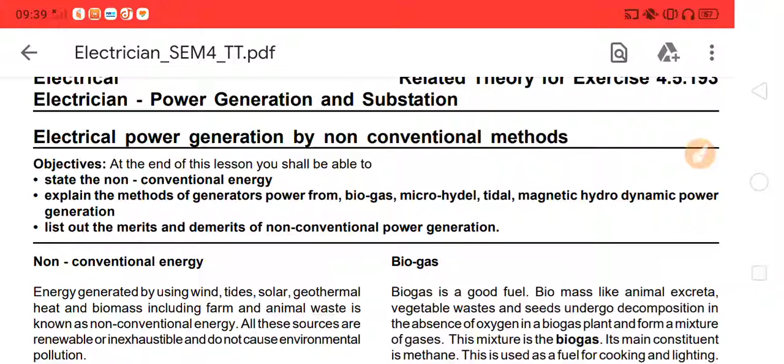Electric power generation by non-conventional method. Non-conventional energy source: energy generated by using wind, tide, solar, geothermal heat, and biomass, including farm and animal waste, is known as non-conventional energy. All these sources are renewable, inexhaustible, and do not cause environmental pollution.

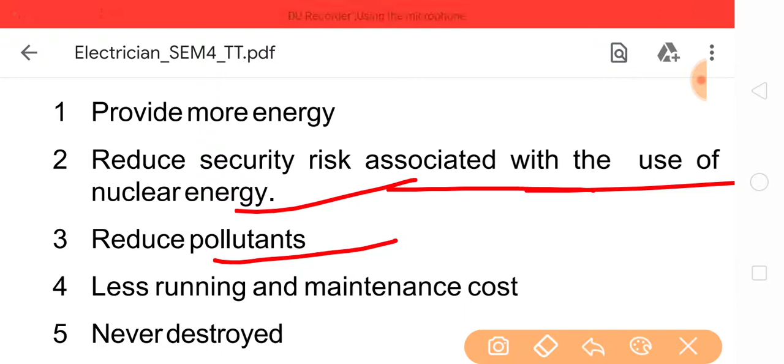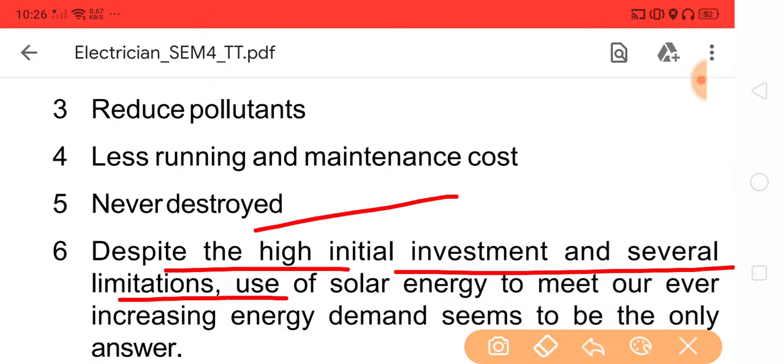Merits of non-conventional over conventional sources of energy: provide more energy, reduce security risk associated with the use of nuclear energy, reduce pollutants, less running and maintenance cost, never destroyed. Despite the high initial investment and several limitations, use of solar energy to meet our ever increasing energy demand seems to be the only answer. Greenhouse effect and global warming is avoided.

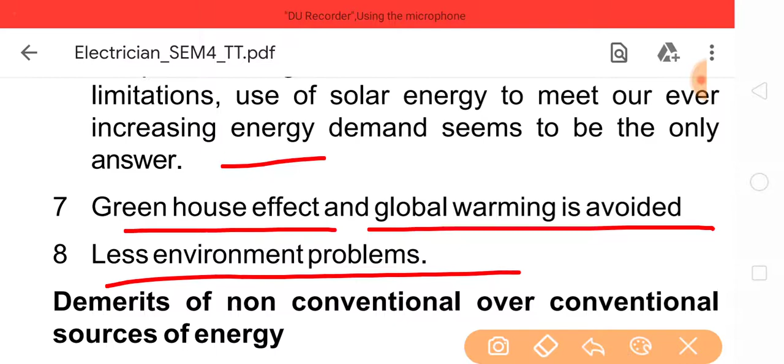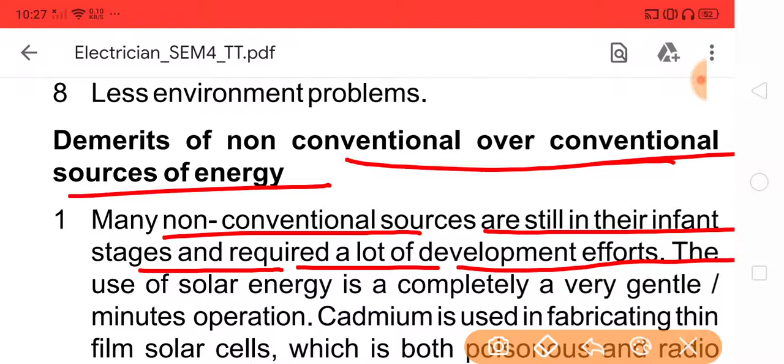Less environmental problems. Demerits of non-conventional over conventional sources of energy: many non-conventional sources are still in their infant stage and require a lot of development effort. The usage of solar energy is a very delicate operation.

Cadmium is used in fabricating thin film solar cells, which is both poisonous and radioactive, but a very small quantity of cadmium is released from discarded PV panels. Carbon dioxide is produced while forming silicon from silica, increasing atmospheric temperature. High initial cost, less reliable, and efficiency; cannot be used for base load demand.

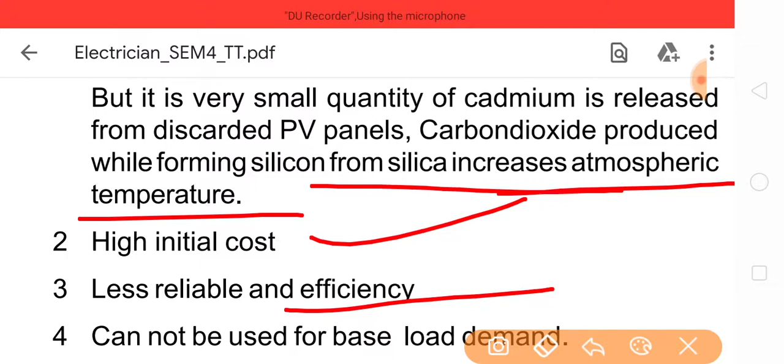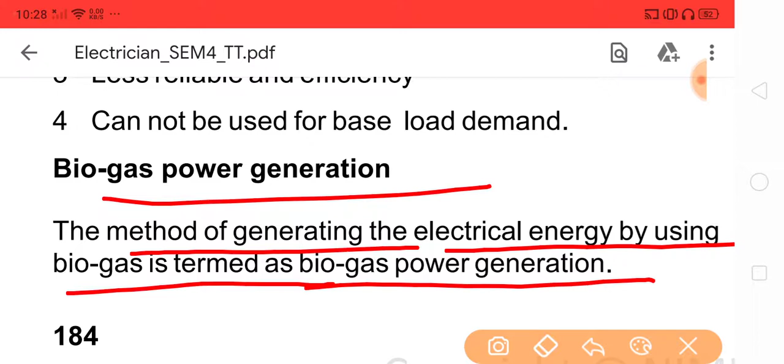Biogas power generation: the method of generating electrical energy by using biogas is termed biogas power generation. Biogas is a good fuel. Biomass like animal excreta, vegetable waste and seeds undergo decomposition in the absence of oxygen in a biogas plant and form a mixture of gases. The mixture is the biogas. Its main constituent is methane. This is used as a fuel for cooking and lighting.

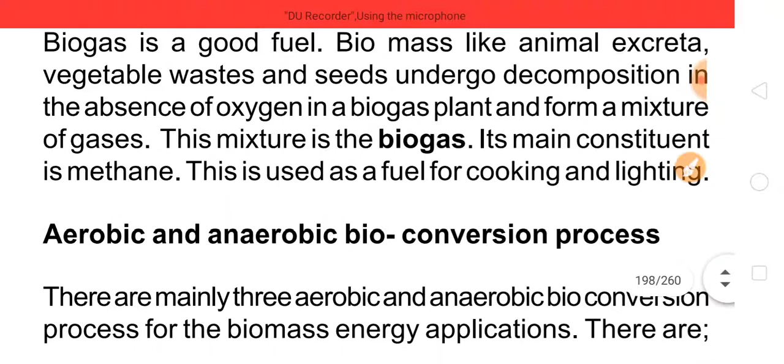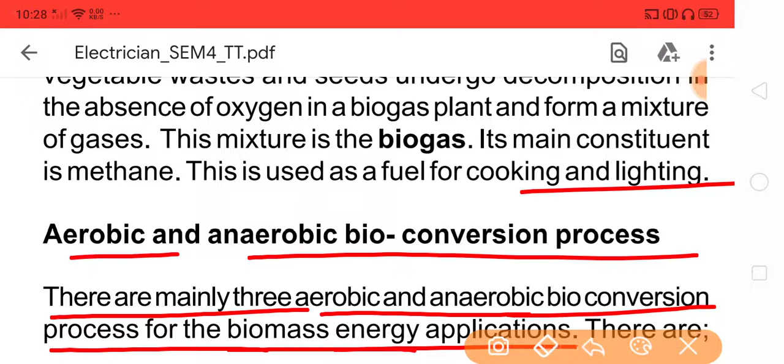Aerobic and anaerobic bioconversion process. There are three aerobic and anaerobic bioconversion processes for biomass energy application. Bioproducts: converting biomass into chemicals for making products that typically are made from petroleum. Biofuels: converting biomass into liquid fuels for transportation. Biopower: burning biomass directly, or converting it into a gaseous fuel or oil, to generate electricity.

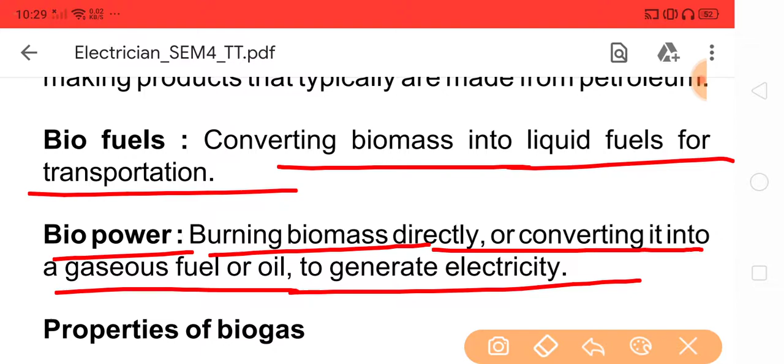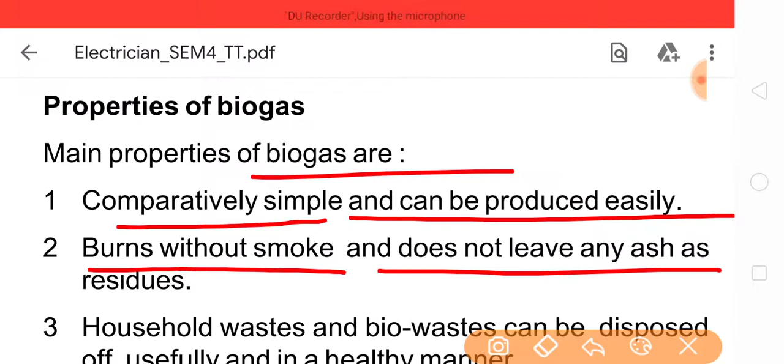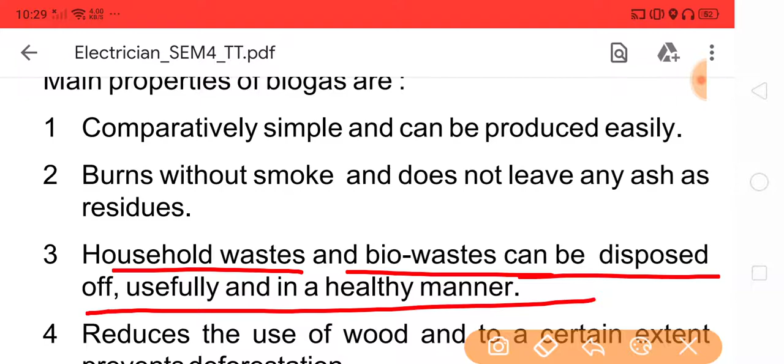Properties of biogas. The main properties of biogas are: comparatively simple and can be produced easily, burns without smoke and does not leave any ash as residue. Household waste and bio-waste can be disposed of usefully and in a healthy manner. Reduces the use of wood and to a certain extent prevents deforestation. The slurry from the biogas plant is excellent manure.

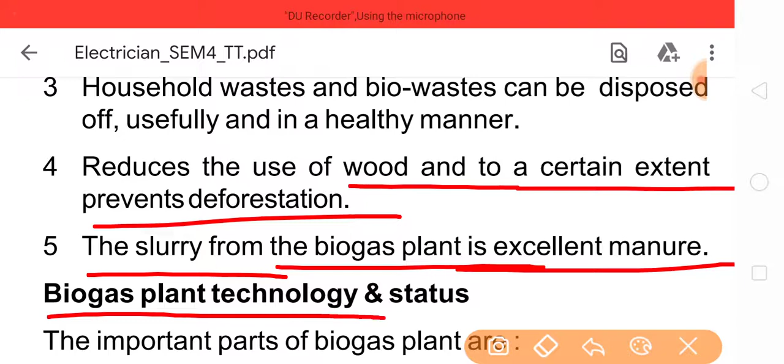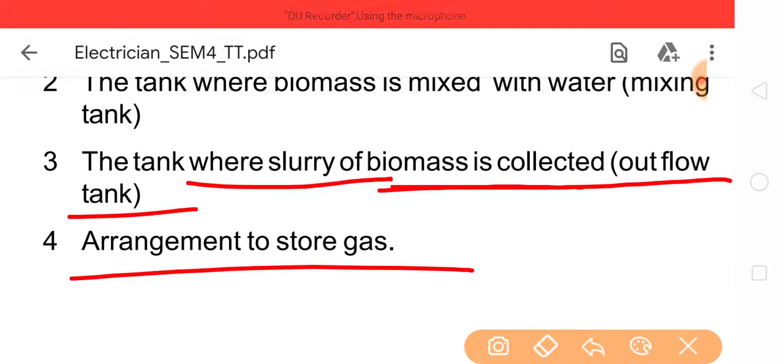Biogas plant technology and status. The important parts of a biogas plant are: the tank where biomass undergoes decomposition, the digester; the tank where biomass is mixed with water, the mixing tank; the tank where slurry of biomass is collected, the outflow tank; and an arrangement to store gas. Due to the action of bacteria in the absence of oxygen, biogas is produced in the plant. This is collected in the tank.

In the gas holder type plant, the cylinder rises up as the gas fills the tank and the storage capacity increases. The gas storage capacity of the dome type will be less than that of the gas holder type. Residues of biomass slurry can be used as good manure. Biogas plants are built in several sizes, small 0.5 cubic meter per day to very large 2500 cubic meter per day. Accordingly, the configurations are simple to complex.

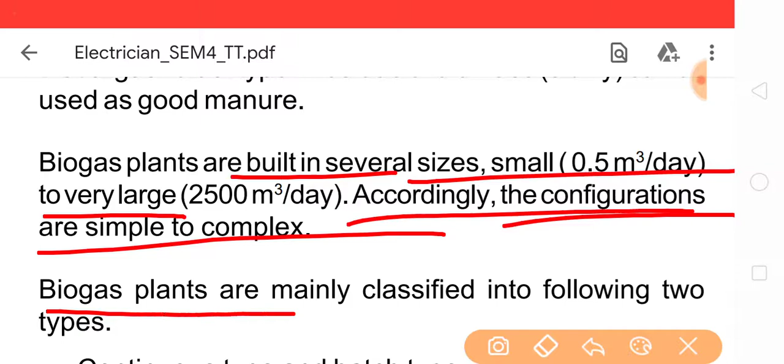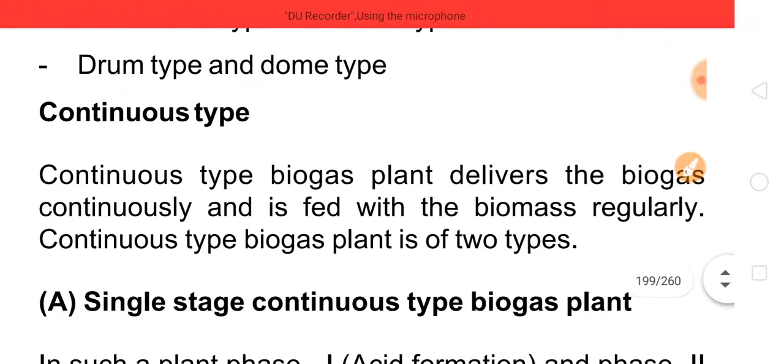Biogas plants are mainly classified into the following two types: continuous type and batch type; drum type and dome type. Continuous type biogas plant delivers the biogas continuously and is fed with biomass regularly. Continuous type biogas plant is of two types: single stage continuous type biogas plant, in such a plant phase 1 acid formation and phase 2 methanation are carried out in the same chamber without barrier.

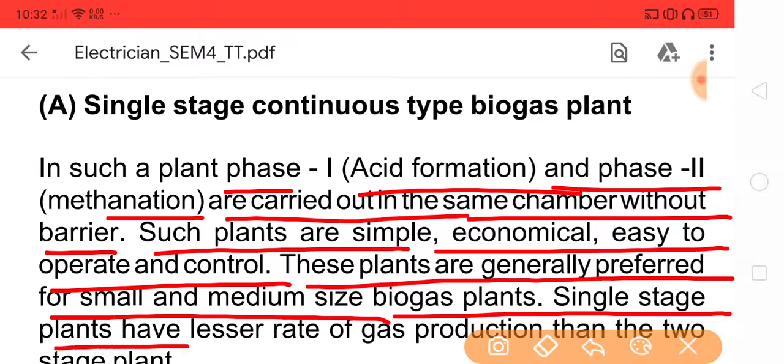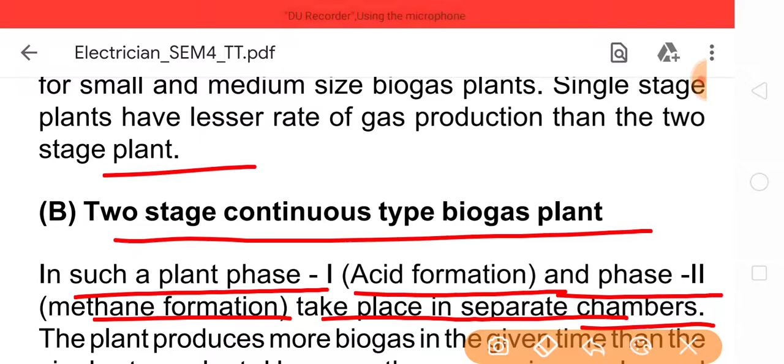Such plants are simple, economical, easy to operate and control. These plants are generally preferred for small and medium sized biogas plants. Single stage plants have a lesser rate of gas production than the two stage plant. Two-stage continuous type biogas plant: in such a plant, phase 1 acid formation and phase 2 methane formation take place in separate chambers. The plant produces more biogas in the given time than the single stage plant. However, the process is complex and the plant costly, difficult to operate and maintain. Two-stage plant is preferred for large biogas plant systems.

Batch type biogas plant. The biomass is fed in batches with a large time interval between two consecutive batches. One batch of biomass feed is given sufficient retention time in the digester, 30 to 50 days. After completion of digestion, the residue is emptied and the fresh charge is fed. The fresh charge may be subjected to aeration or nitrogenation after feeding, and then the digester covers are closed for the digestion process. Thereafter, biogas is derived from the digester after 10 to 15 days. Fermentation continues for 30 to 50 days.

Salient features: the batch type biogas plant delivers gas intermittently and not continuously. Batch type biogas plant may have several digester reactors which are fed and discharged in a sequential manner to obtain output biogas continuously. Batch type biogas plants have longer digestion time and are therefore more suitable for materials which are difficult for anaerobic digestion, harder, fibrous biomass. Batch type biogas plants need initial seeding to start the anaerobic fermentation.

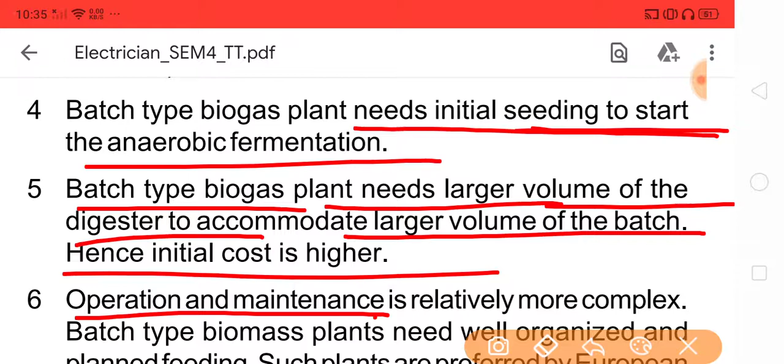Batch type biogas plants need initial seeding to start the anaerobic fermentation. Batch type biogas plants need a larger volume of the digester to accommodate the large volume of the batch, hence initial cost is higher. Operation and maintenance is relatively more complex. Batch type biomass plants need well organized and planned feeding. Such plants are preferred by European farmers. Such plants are not yet popular in India.

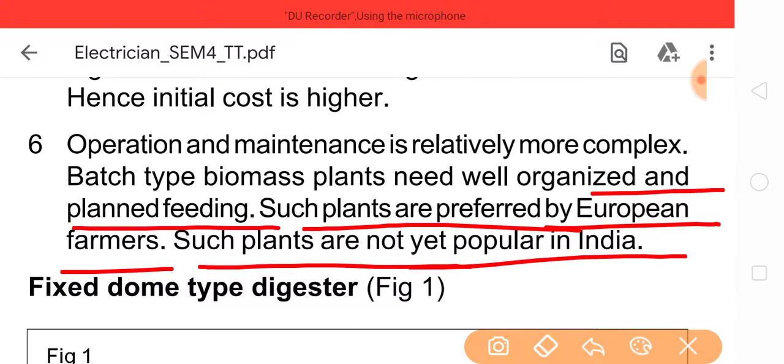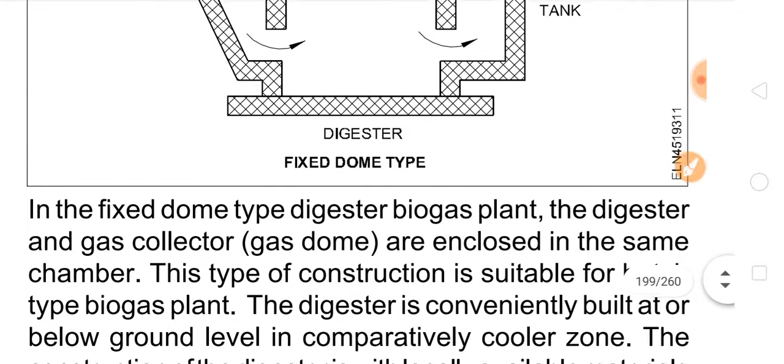Fixed dome type digester, pictured here: this is the biomass, water and cooling chamber, biogas, slurry, mixing tank and outflow tank, digester. Fixed dome type. In the fixed dome type digester biogas plant, the digester and gas collector gas dome are enclosed in the same chamber. This type of construction is suitable for batch type biogas plants.

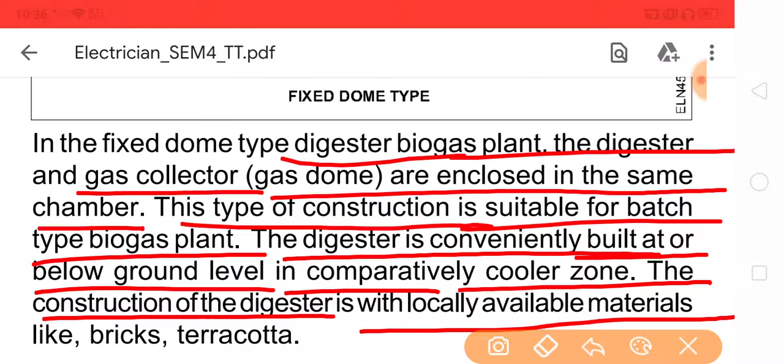The digester is conveniently built at or below ground level in a comparatively cooler zone. The construction of the digester is with locally available material like brick and terracotta. The pressure inside the digester increases as the biogas is liberated. The biogas gets collected in the upper portion of the digester in a dome-shaped cavity. The outlet pipe is provided at the top of the fixed dome.

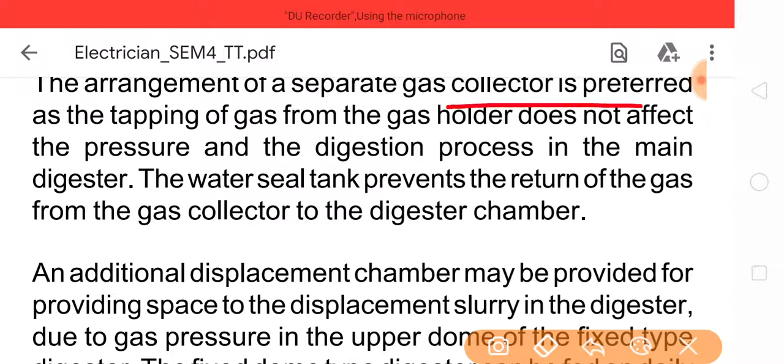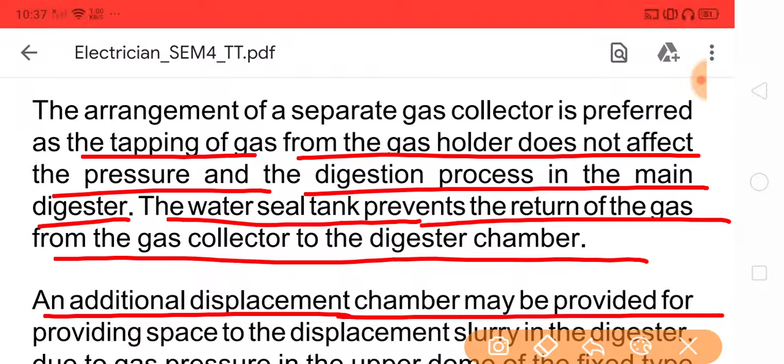Alternatively, the gas collector gas holder is a separately installed chamber. The digester tank and gas collector chamber are separated by a water seal tank. The arrangement of a separate gas collector is preferred so that the tapping of gas from the gas holder does not affect the pressure and the digestion process in the main digester. The water seal tank prevents the return of the gas from the gas collector to the digester chamber. An additional displacement chamber may be provided for providing space to displaced slurry in the digester due to gas pressure in the upper dome of the fixed type digester.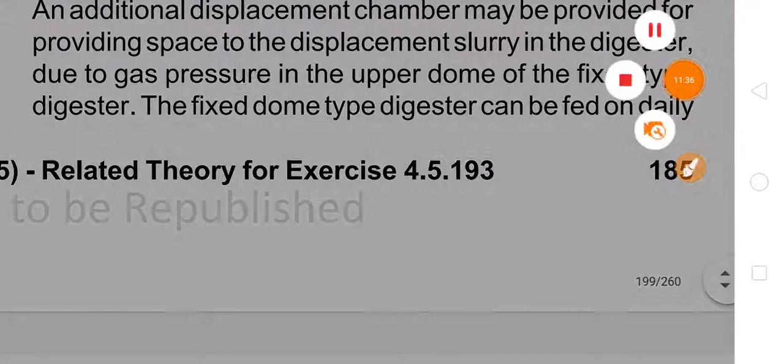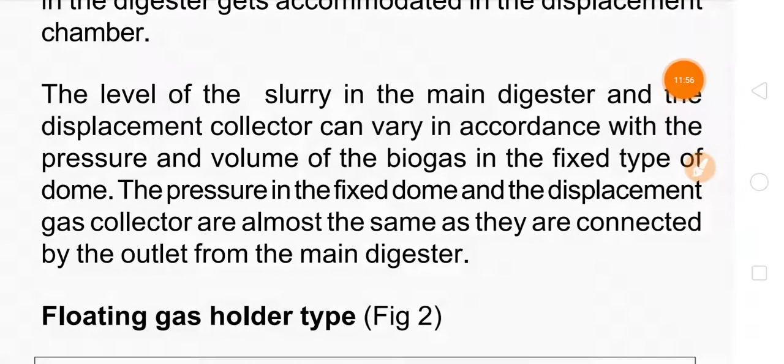The fixed dome type digester can be fed on a daily basis with a small quantity of slurry. The excess slurry in the digester gets accommodated in the displacement chamber. The level of the slurry in the main digester and the displacement collector can vary in accordance with the pressure and volume of the biogas in the fixed type of dome. The pressure in the fixed dome and the displacement gas collector are almost the same as they are connected by the outlet from the main digester.

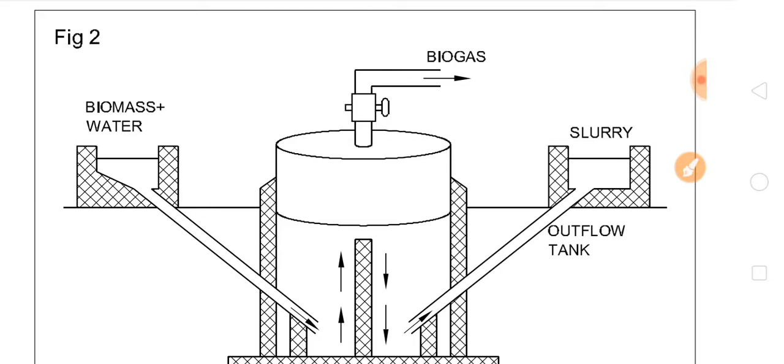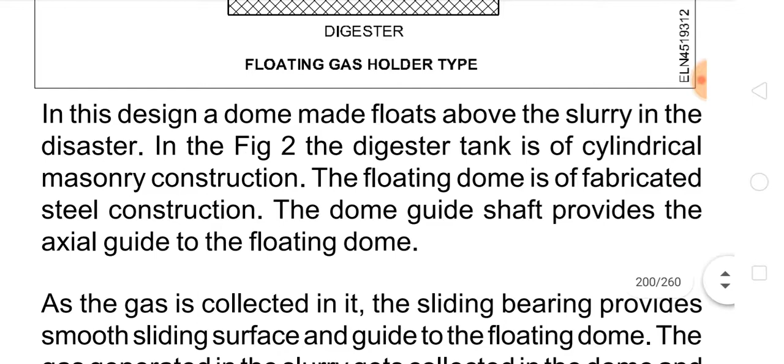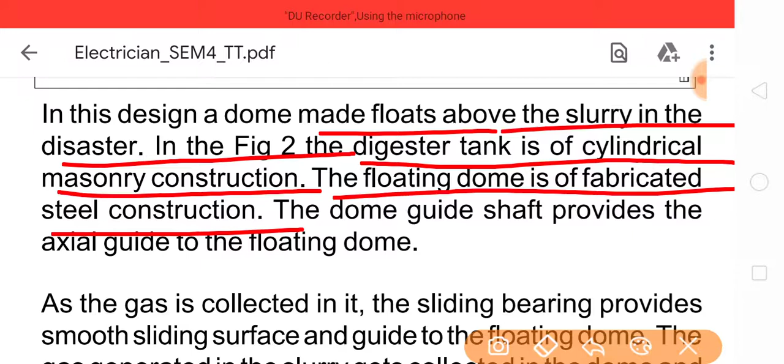Floating gas holder type, pictured here: this is the biomass water, and this is the biogas, and this is the slurry outflow tank and digester, floating gas holder type. In this design, a dome floats above the slurry in the digester. In picture 2, the digester tank is of cylindrical masonry construction. The floating dome is of fabricated steel construction. The dome guide shaft provides the axial guide to the floating dome.

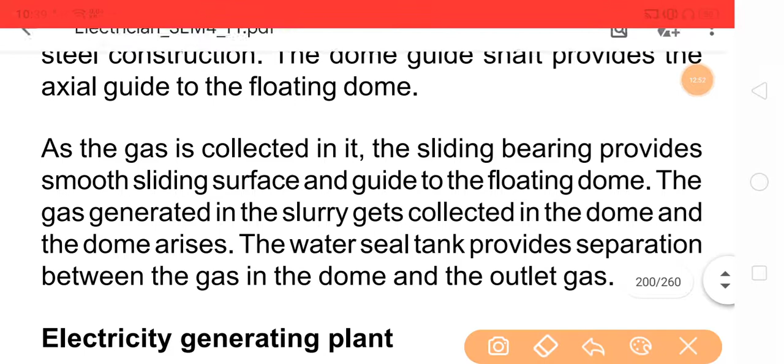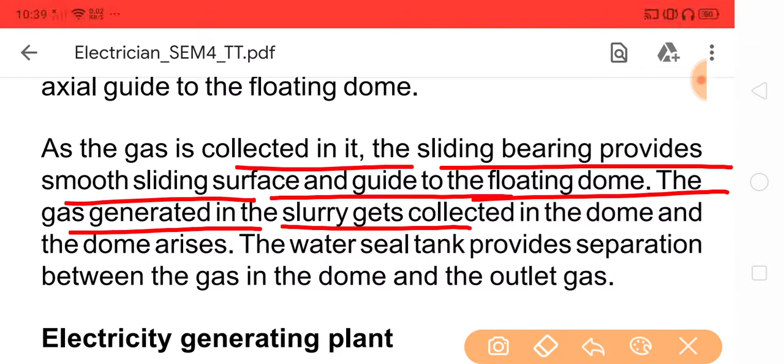As the gas is collected, the sliding bearing provides a smooth sliding surface and guide to the floating dome. The gas generated in the slurry gets collected in the dome and the dome rises. The water seal tank provides separation between the gas in the dome and the outlet gas.

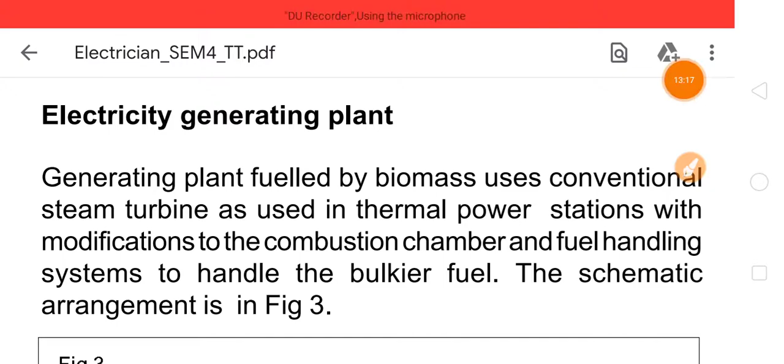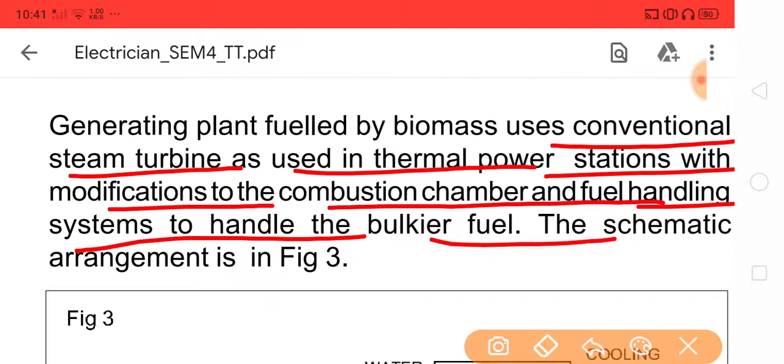Electricity generation plant. Generating plants fueled by biomass use a conventional steam turbine as used in a thermal power station, with modification to the combustion chamber and fuel handling system to handle the bulkier fuel. The schematic arrangement is pictured in figure 3.

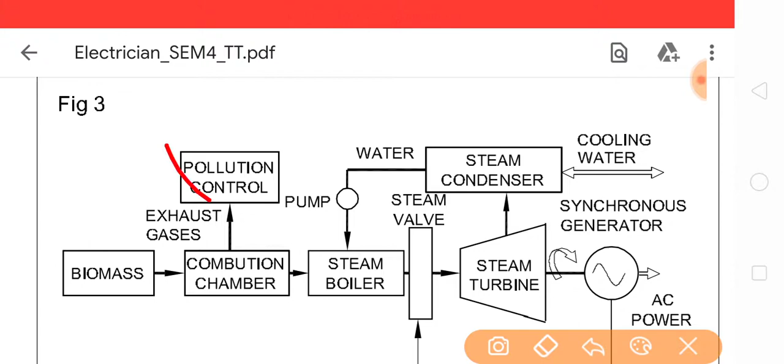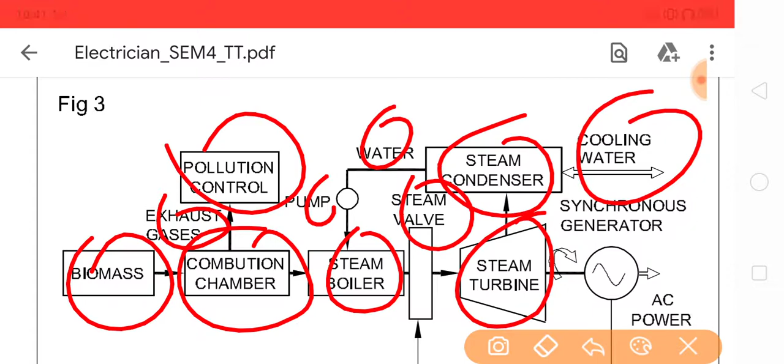This is the pollution control and exhaust gases, water, pumps and steam condenser. This is the cooling water, steam valve, steam boiler, combustion chamber, biomass and steam turbine. And this is the AC power. And this is the speed control, the electricity generation powered by biomass. Cogeneration. Because of the poor energy conversion efficiencies of biomass fuel, practical generating systems often employ cogeneration to achieve reasonable utilization of the generating plant.

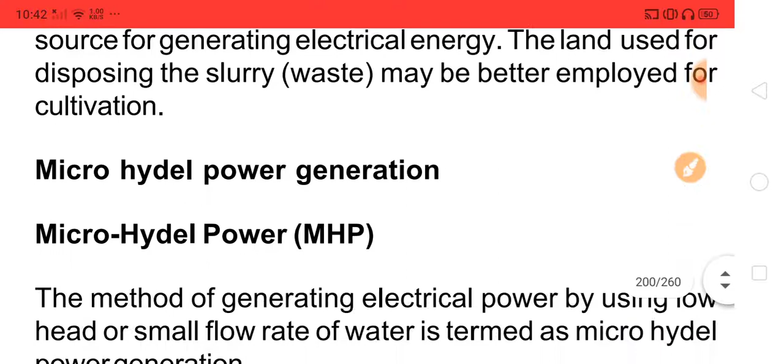Environmental issues. While biomass crops provide an environmentally friendly fuel source for generating electrical energy, the land used for disposing the slurry, that is waste, may be better employed for cultivation. Micro hydel power generation.

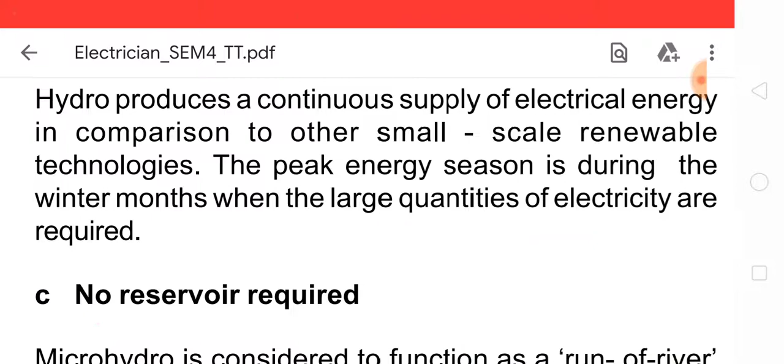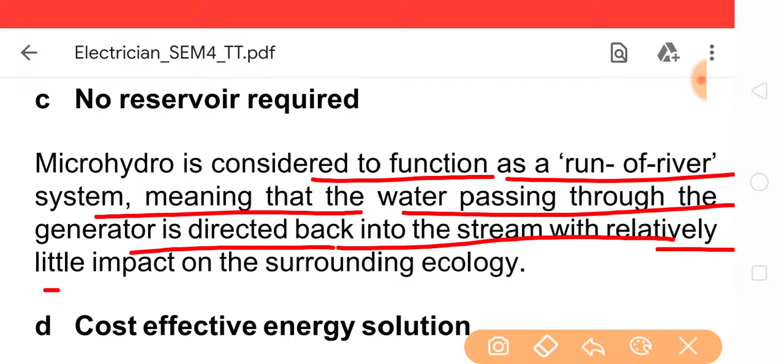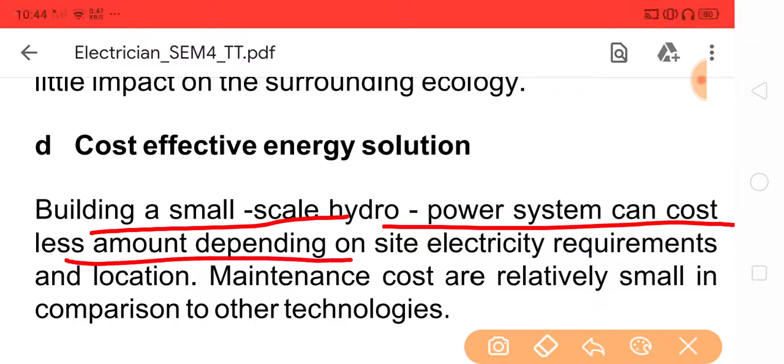Micro hydro is considered to function as a run-of-river system, meaning that the water passing through the generator is directed back into the stream with relatively little impact on the surrounding ecology. Cost-effective energy solution. Building a small-scale hydropower system can cost less depending on site, electricity requirements and location. Maintenance costs are relatively small in comparison to other technologies.

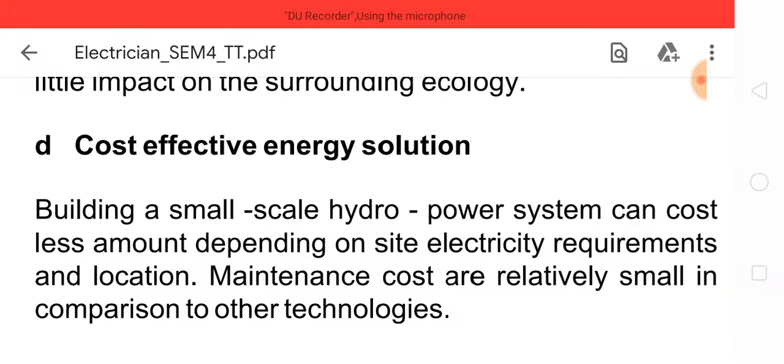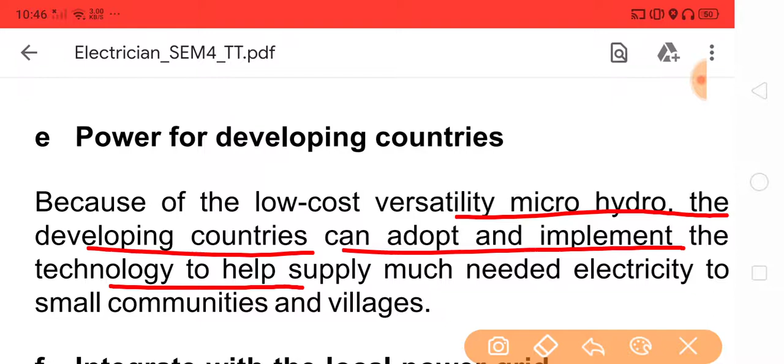Power for developing countries. Because of the low cost and versatility of micro hydro, developing countries can adopt and implement the technology to help supply much needed electricity to small communities and villages. Integrated with the local power grid. If your site produces a large amount of excess energy, some power companies will buy back your electricity overflow.

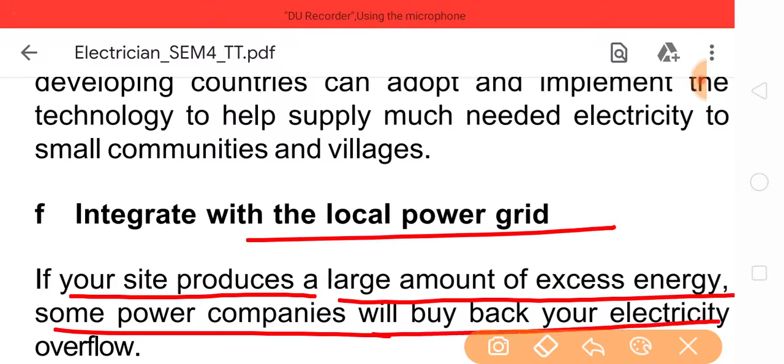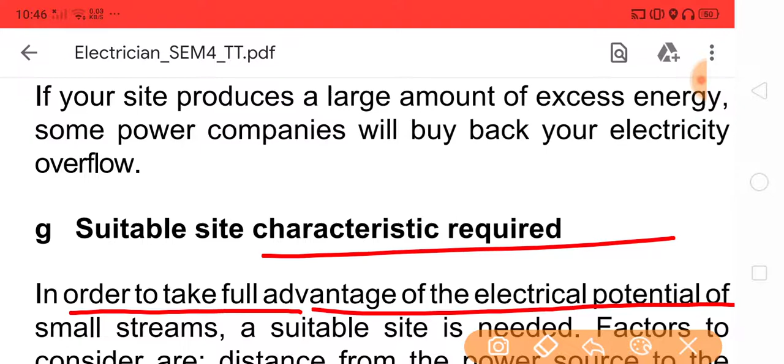Suitable site characteristics are required in order to take full advantage of the electrical potential of a small stream. A suitable site is needed. Factors to consider: distance from the power source to the location where energy is required, stream size including flow rate, output and head, inverter, batteries, controller, transmission line and pipelines.

Disadvantage: energy expansion not possible. The size and flow of a small stream may restrict future site expansion as power demand increases.

Low power in the summer months: stream size will fluctuate seasonally. During the summer months, there will likely be less flow and therefore less power output. Advanced planning and research will be needed to ensure adequate energy requirements are met.

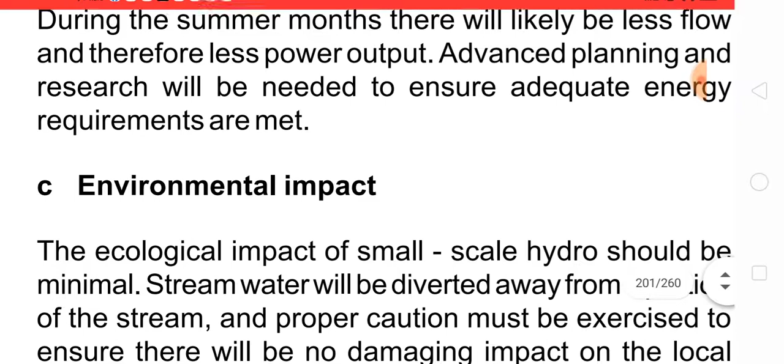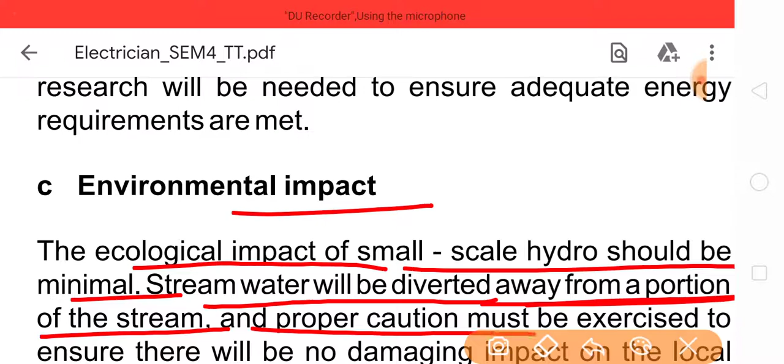Environmental impact: the ecological impact of a small scale hydro should be minimal. Stream water will be diverted away from a portion of the stream, and proper caution must be exercised to ensure there is no damaging impact on the local ecology or civil infrastructure.

Micro hydroelectric system basic components. Here are brief descriptions of the common equipment used in grid-interactive and off-grid micro hydroelectric systems. The basic components of the system may vary, as not all of the following equipment is necessary for every system.

Intake, pipeline, turbine, controls, dump load, battery bank, metering, main DC connect, inverter, AC breaker panel.

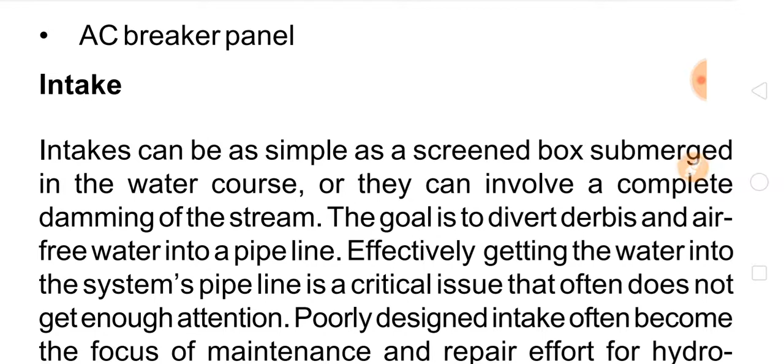Intake can be as simple as a screened box submerged in the water course, or it can involve complete damming of the stream. The goal is to divert debris-free water into a pipeline, effectively getting the water into the system.

Pipeline is a critical issue that often does not get enough attention. Poorly designed intakes often become the focus of maintenance and repair efforts for hydroelectric systems.

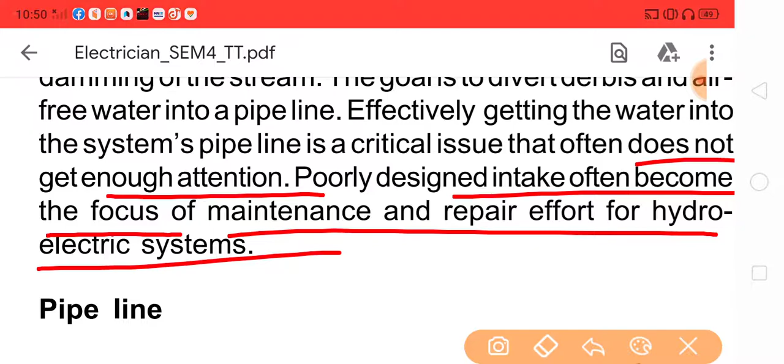Pipeline: most hydro turbines require at least a short run of pipe to bring water to the machine, and some turbines require piping to move water away from it. The length can vary widely depending on the distance between source and turbine.

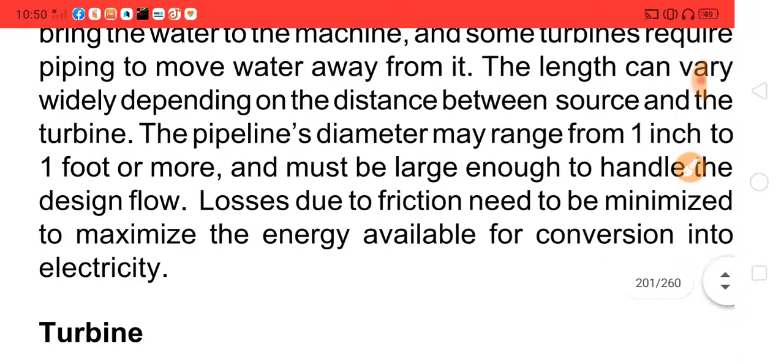The pipeline diameter may range from 1 inch to 1 foot or more, and must be large enough to handle the design flow. Losses due to friction need to be minimized to maximize energy available for conversion into electricity.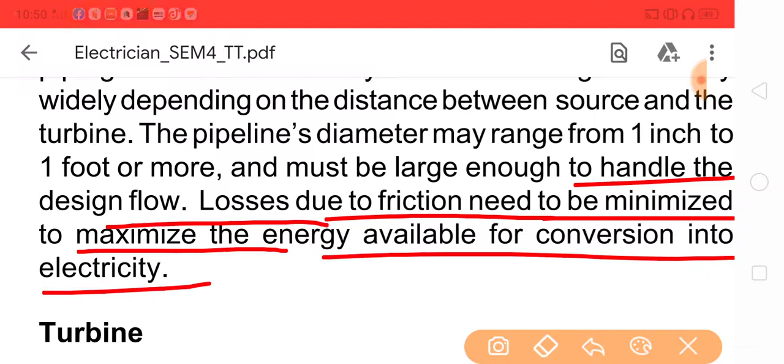Turbine: the turbine converts energy from the water into electricity. Many types of turbines are available, so it is important to match the machine to site conditions for head and flow.

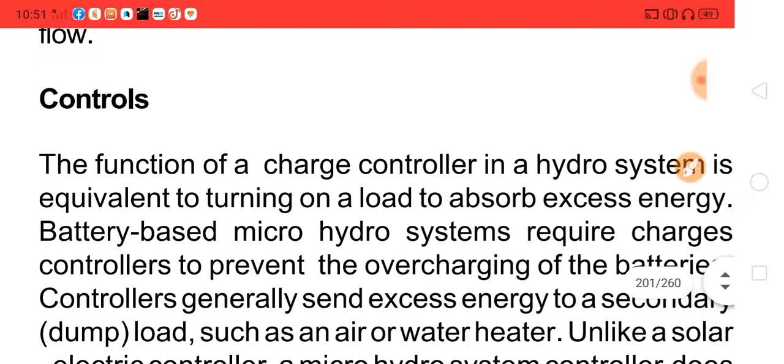Controls: the function of charge control in a hydro system is equivalent to turning on a load to absorb excess energy.

Battery-based micro hydro systems require a charge controller to prevent overcharging of the batteries. Controllers generally send excess energy to a secondary dump load, such as an air or water heater. Unlike a solar electric controller, a micro hydro system controller does not disconnect the turbine from the batteries.

This could create voltages higher than some components can withstand, cause the turbine to overspeed, which could result in dangerous and damaging over-voltage.

Dump load: an electrical resistance heater that must be sized to handle the full generating capacity of the micro hydro turbine. Dump loads can be air or water heaters and are activated by the charge controller whenever the battery bank cannot accept the energy being produced, to prevent damage to the system. The excess energy is shunted to the dump load when necessary.

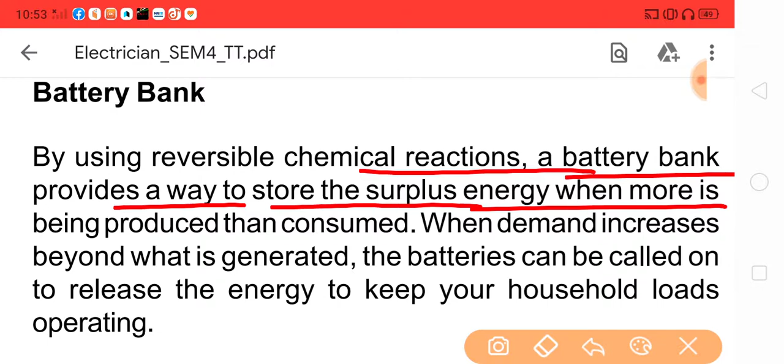Battery bank: by using reversible chemical reactions, a battery bank provides a way to store surplus energy when more is being produced than consumed. When demand increases beyond what is generated, the batteries can be called on to release energy to keep household loads operating.

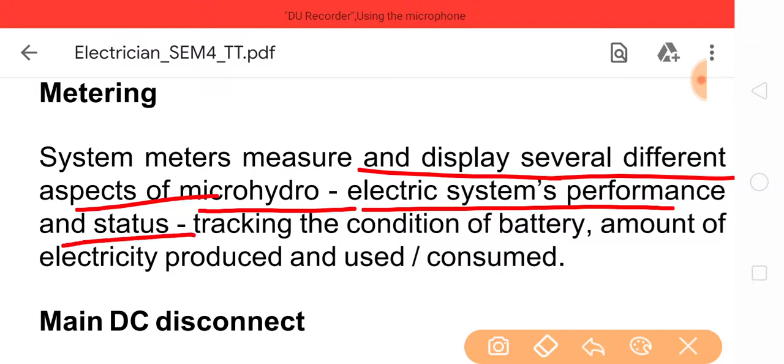Metering: the system meters measure and display several different aspects of micro hydroelectric system performance and status, tracking the condition of the battery and the amount of electricity produced and consumed.

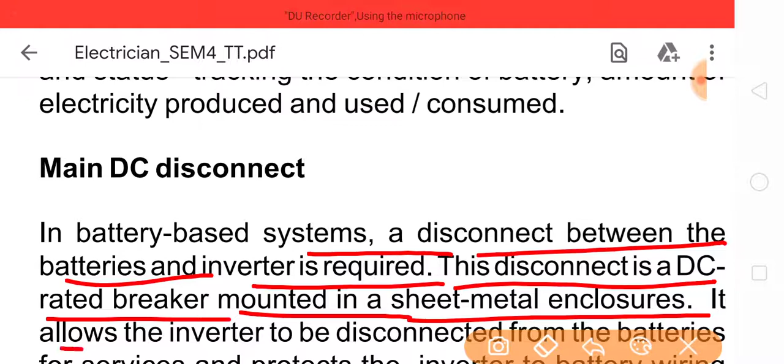Main DC disconnect: in battery-based systems, a disconnect between the batteries and inverter is required. The disconnect is a DC-rated breaker mounted in a sheet metal enclosure. It allows the inverter to be disconnected from the batteries for service, and protects the inverter-to-battery wiring against electrical faults.

Inverter: the inverter transforms DC electricity stored in the battery into AC electricity for powering household appliances. Grid-tied inverters synchronize the system's output with the utility AC electricity, allowing the system to feed hydroelectricity to the utility grid.

Battery-based inverters for off-grid or grid-tied systems often include a battery charger, which is capable of charging the battery bank from either the grid or a backup generator.

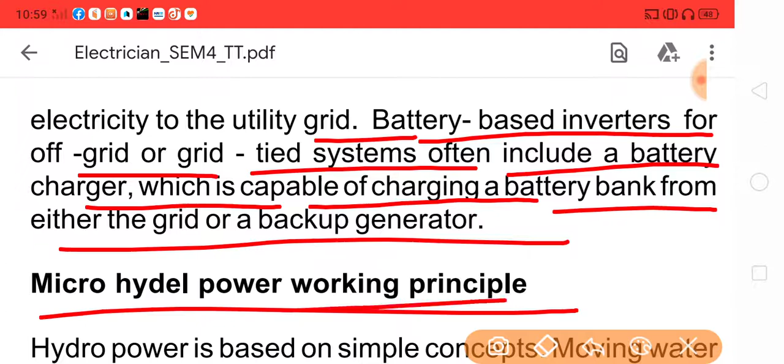Micro hydel power working principle: hydropower is based on a simple concept - moving water turns a turbine, the turbine spins a generator, and electricity is produced. Many other components may be in a system, but it all begins with the energy already within the moving water.

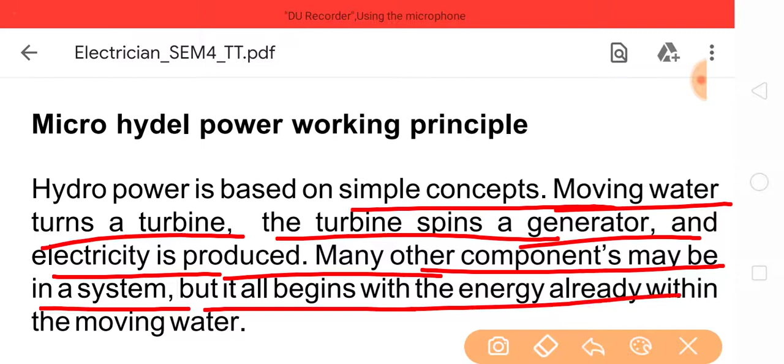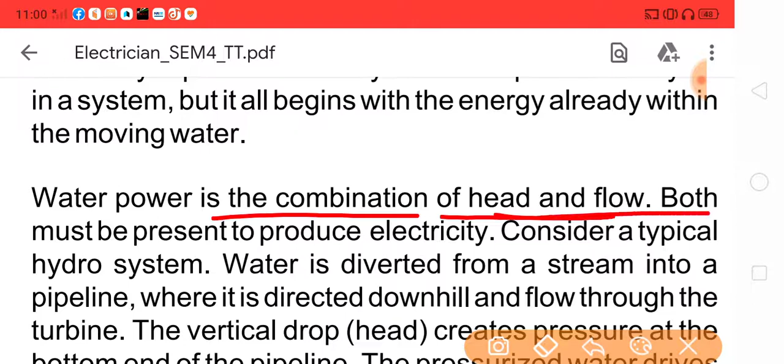Water power is the combination of head and flow. Both must be present to produce electricity. Consider a typical hydro system: water is diverted from a stream into a pipeline, where it is directed downhill and flows through the turbine.

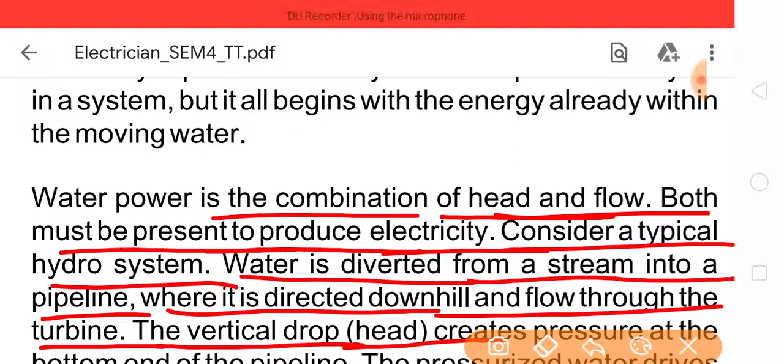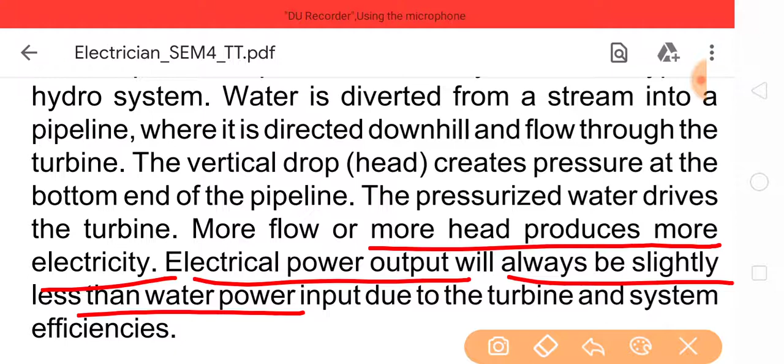The vertical drop, or head, creates pressure at the bottom end of the pipeline. The pressurized water drives the turbine; more flow or more head produces more electricity. Electrical power output will always be slightly less than water power input due to turbine and system efficiencies.

Flow is water quantity and is expressed as volume per time, such as gallons per minute (GPM), cubic feet per second (CFS), or liters per minute (LPM).

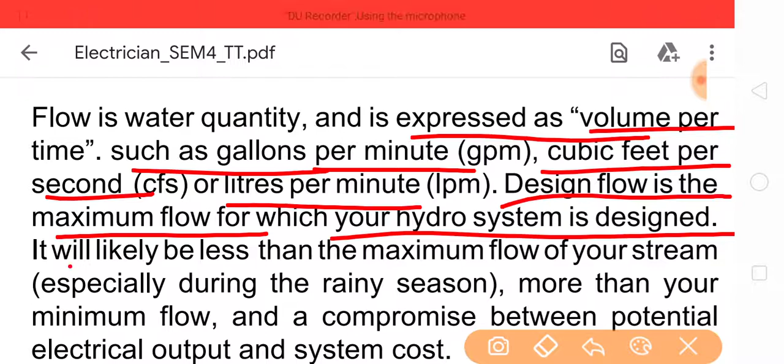Design flow is the maximum flow for which your hydro system is designed. It will likely be less than the maximum flow of your stream, especially during the rainy season, more than your minimum flow, and a compromise between potential electrical output and system cost.